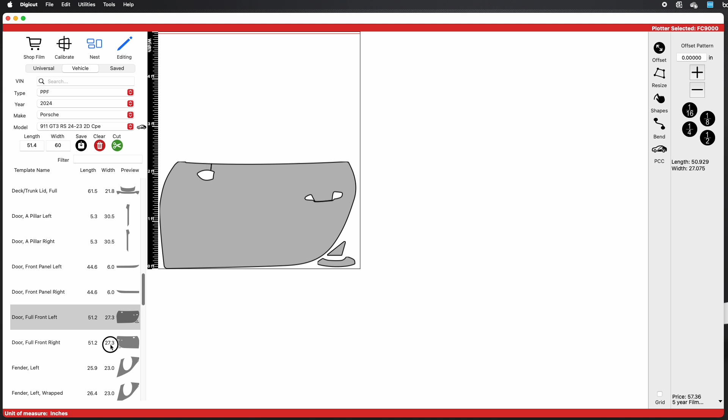Start by choosing your template. In this one, I'm going to choose the full doors. This feature takes any full coverage template we've made and converts them into a template for protective color change film. It removes any cutouts and offsets the template in one action.

Now that I have both templates on the artboard, I'm going to hold the Shift key and click on each one to select them. Then right-click and select Edit Template. Click on the P.C.C button.

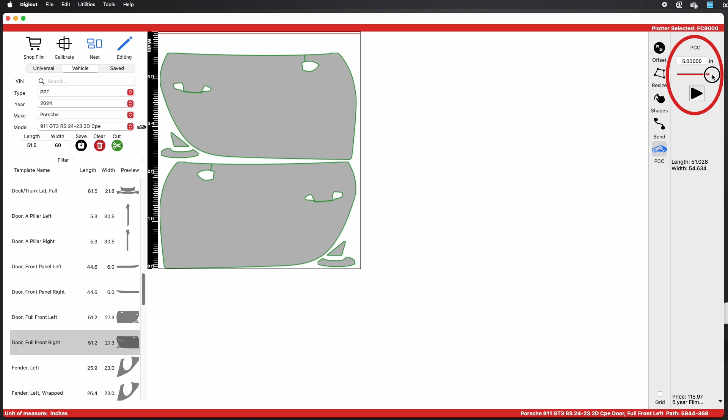Up top, you'll see a slider that allows you to choose how much you want to offset the template. You can choose from 1 inch all the way to 5 inches. You can also key in the dimension you prefer.

Press the play button and you'll see that it automatically has deleted any cutouts and is ready to cut. Once it completes the operation, it might overlap templates.

If so, make sure to arrange them until the red outlines disappear.

Also note that I'm rotating these templates by clicking on my scroll wheel and rotating back and forth. Using this method is faster and is also handy because the rotation axis is determined by where my arrow is currently at.

I'm going to use the same car for this example. This is the full rear quarter.

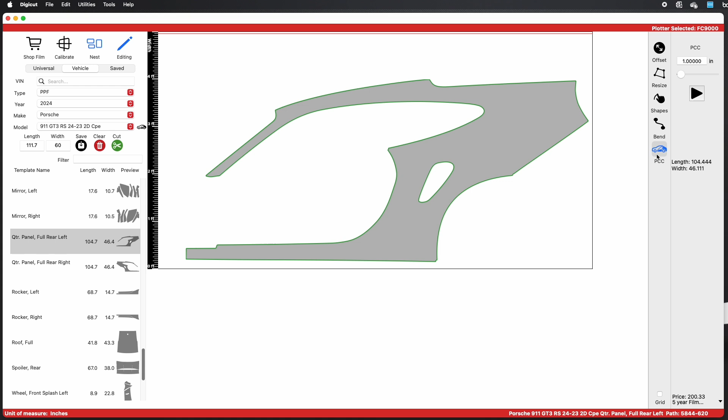Right-click, select Edit Template. Click on the P.C.C button, then select the dimension. In this case, I'm going to choose 3 inches. Then press the play button.

In the final example, I'm going to check the icon to make sure the full body is available for this model.

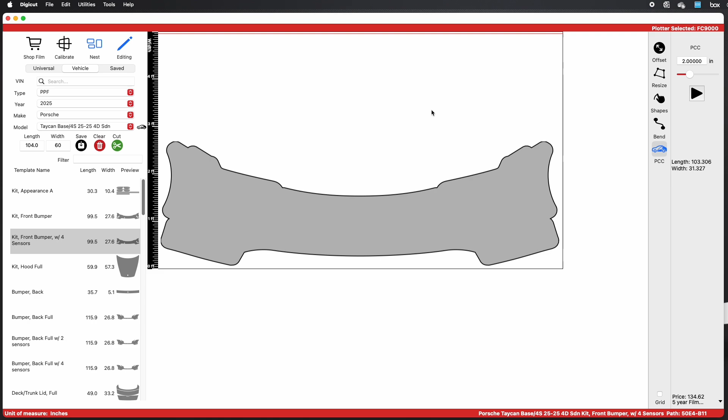Right-click, select Edit Template. Then click the P.C.C button, choose your dimension, and push play. Arrange it back to the artboard once finished.